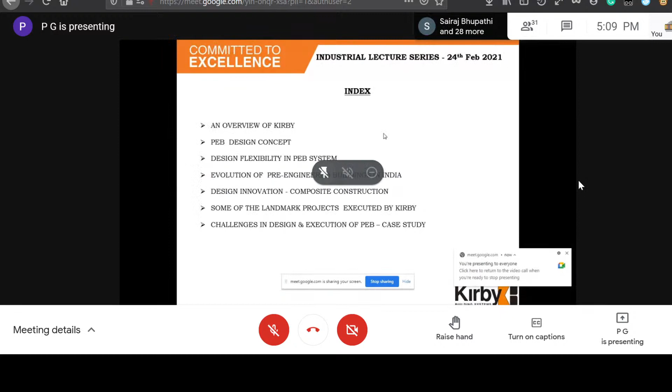In this, I would like to present an overview of Kirby and PEB design concept, design flexibility in PEB systems, evolution of pre-engineered buildings in India, composite construction with a brief note on that, some landmark projects executed by Kirby, then challenges in design and execution of PEB, and a case study.

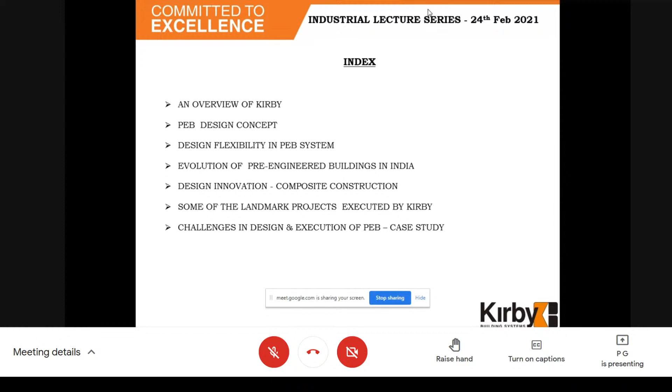I've taken up a case study to present those. Now, an overview of Kirby.

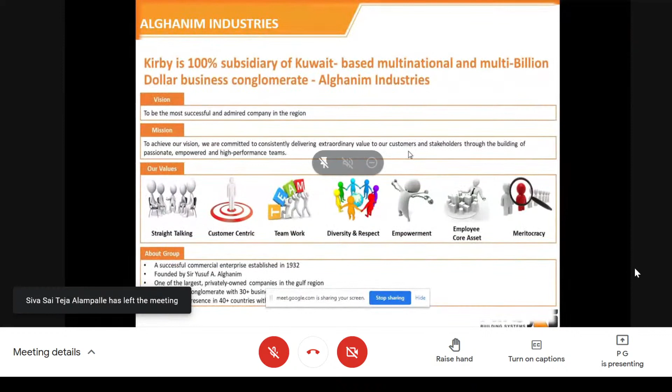Kirby is a part of Alghanim Industries, which is a Kuwait-based multinational and multi-billion-dollar business conglomerate, and Kirby is a 100% subsidiary of it. We have a high-tech standard vision and values.

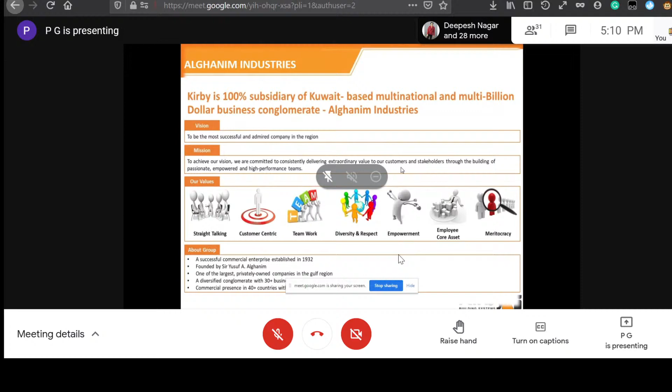About Alghanim Industries, it started in 1932, founded by Sir Alghanim, and it is one of the largest privately owned companies in the Gulf region.

Other than Kirby, it has many other business sectors, and it is worldwide with an international presence. Business sectors include automotive, engineering, food and beverages, industrial, consumer, and service. So Kirby comes under the manufacturing sector.

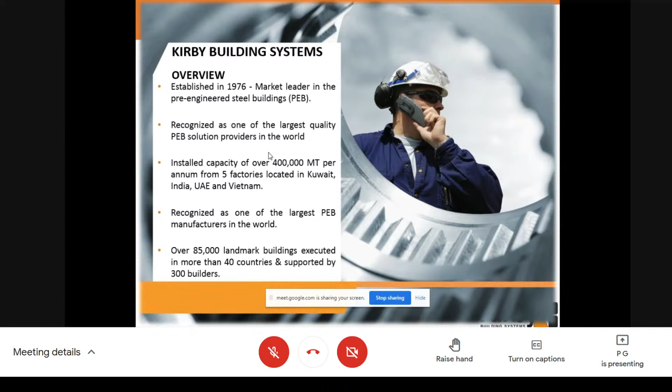About Kirby, it is established in 1976, a market leader in pre-engineered steel buildings, one of the largest quality PEB solution providers in the world. We have a manufacturing capacity of 4 lakh tons per annum, 5 factories located in Kuwait, India, UAE, and Vietnam. We are recognized as one of the largest PEB manufacturers in the world, with over 85,000 landmark buildings executed in more than 40 countries and supported by 300 builders.

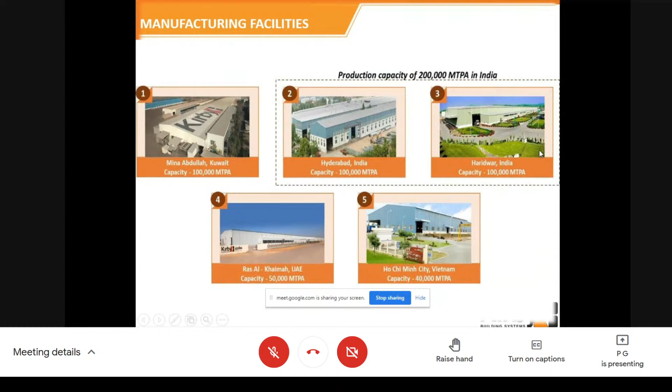You can view the factories here: 5 factories we have, 1 in Kuwait, 2 in India in Hyderabad and Haridwar, 1 in UAE, and 1 in Vietnam. This is our corporate office located at Madhapur, called the Center of Engineering Excellence. For all four plants except Vietnam, we have all engineering activities here.

Systems and practices: we have very expert engineering, about 250 structural engineers, and we have a state-of-the-art facility to quote the most optimized design for any kind of complex building in a minimum short time, using sophisticated latest software.

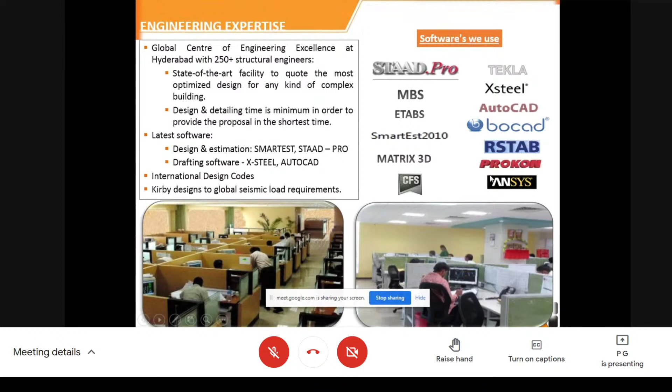For design, we use STAAD.Pro, MBS, ETABS, in-house software like Smartest and Matrix 3D, and for cold form sections, CFS. We use Tekla, Xsteel, AutoCAD, BoCAD, RStab, Prokon, and ANSYS.

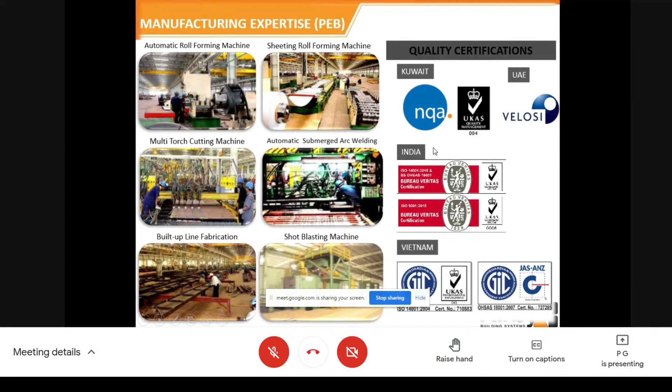Expertise like structural steel: for structural steel in high-rise buildings and power plants, which also require material plate thicknesses more than 60mm and even up to 100mm. So to cut, we require the most accurate CNC cutting machinery. We have all the sophisticated machinery here.

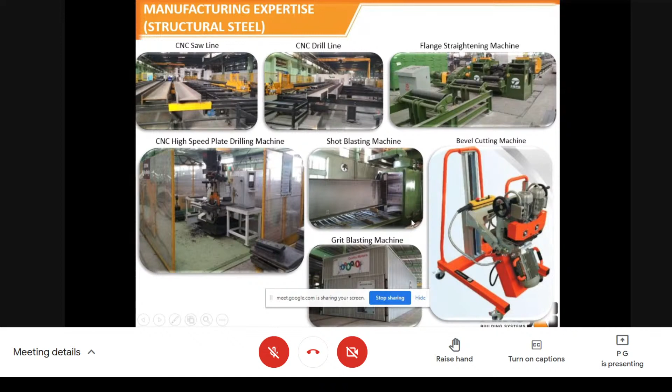We have a separate production line for storage solutions, because all these are made of slotted cold form sections, which is suitable for racking and other storage solutions.

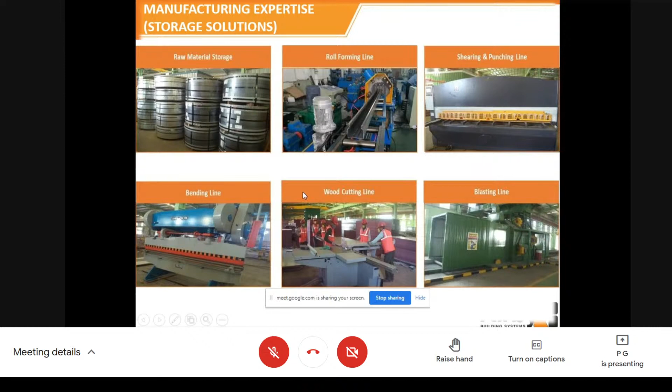And we very meticulously do material inspection from time to time for all the basic material as well as the finished product. Checks are done at all stages to provide a quality product to the customer.

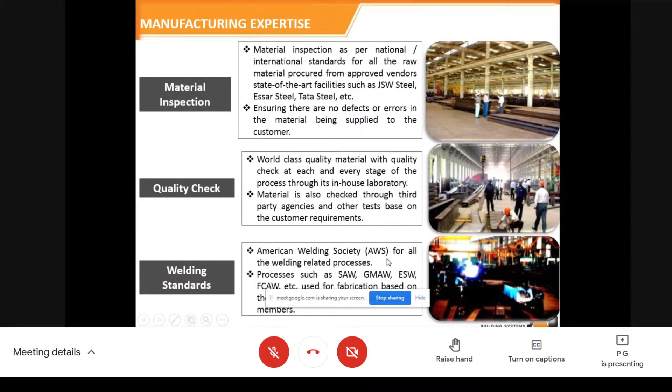This is the quality laboratory. We have very latest machinery for mechanical property testing, destructive and non-destructive, welding ultrasonic tests, and salt spray test.

And these are all the checks other than the regular quality checks. If the customer requires any special checks, we do all this.

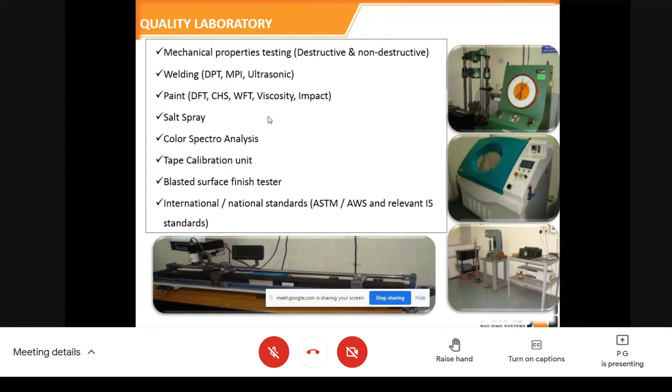Safety procedures are very important to maintain, to achieve and maintain zero accidents as our goal. So at every stage in production, in the factory, as well as at every site, we follow these norms.

We follow the LEED requirements for maintaining the product as a green building, because steel is recyclable and it can be reinstalled wherever location we require, with no welding fabrication at site. We ensure that to save energy.

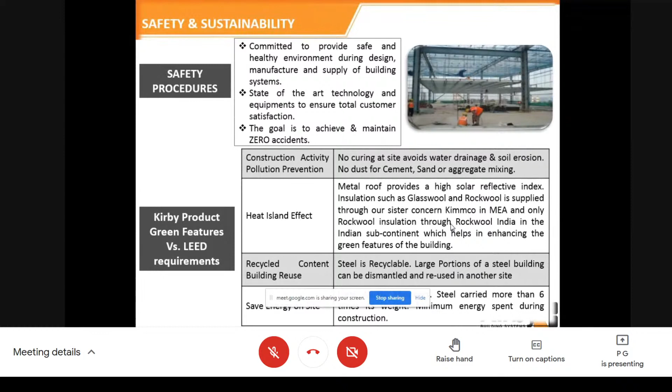The other products, other than PEB: Kirby also does structural steel as well as storage solutions.

The Kirby PEB applications are various; any building can be done with the PEB concept. As an example, the sectors are divided as industrial buildings, warehouses, offices, showrooms, aircraft hangars, metro stations, agricultural buildings, and auditoriums. Any product, any building, any structure can be done with the PEB concept.

Kirby has proved that. Kirby is the market leader across all regions wherever it operates, having completed over 85,000 buildings globally and over 25,000 buildings in India alone, totaling 35 million square meters.

The greatest thing for the success of Kirby is that we attend to the customer to the fullest, so that 60% of our business is from repeat customers.

The largest PEB in terms of area, a single project in Chennai, Renault Nissan, is 3 lakh square meters. So this is the world's largest PEB, done by Kirby.

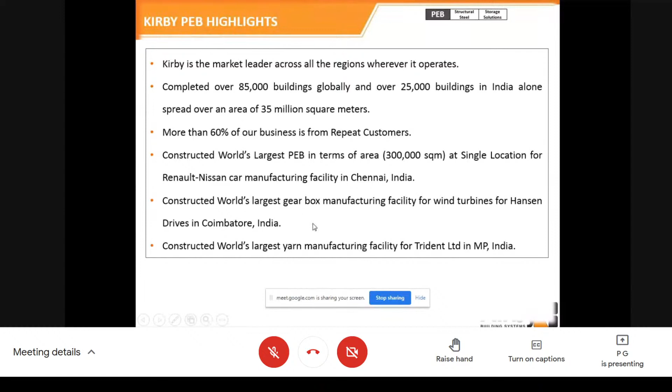Kirby constructed the world's largest gearbox manufacturing facility, the world's largest yarn manufacturing facility, the world's largest container glass manufacturing facility, and the world's largest facility for Suzlon Energy.

Kirby is the only big company which could dare to take on the challenge to lift a 500-tonne crane and tested its site for Alstom Bharat Forge.

A great achievement for Kirby, partnering with all the top leading companies across various industry segments for setting up their industrial facilities in all regions.

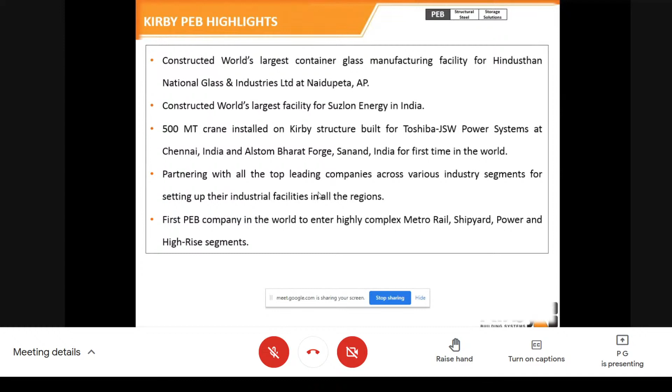Kirby was the first PEB company in the world to enter the highly complex metro rail, shipyard, power, and high-rise segments. So with all these highlights, Kirby has established itself as leader in PEB in the world.

Other than regular applications, we have also taken up special projects like multi-story buildings with composite construction. This building, Phoenix, is in the Gachibowli area, and all the columns are made with composite columns.

Flyover bridge in Delhi, which is done for faster arrival. We have taken up this, and each girder weighed around 3,000 tons.

This is infrastructure, other TG buildings. This is the G plus 13 floor building in Jammu and Kashmir, a residential complex.

So that's a big challenge to be taken up by Kirby. And heavy structures like in Mumbai, G plus 12 floor, with heavy loads in all floors. So these are all done with PEB concept.

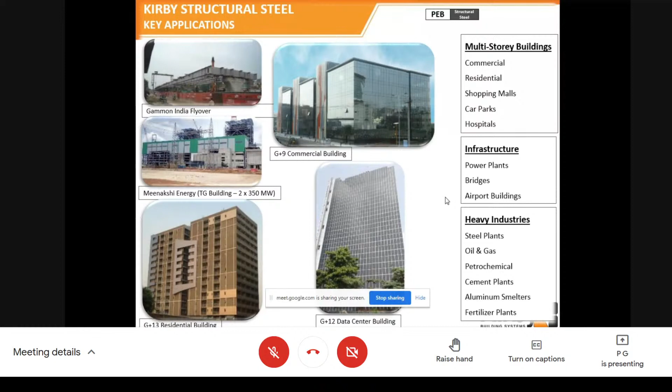This is the product range of storage solutions, the racking systems, weight racking systems which are installed inside a warehouse for storing their material to save the storage space.

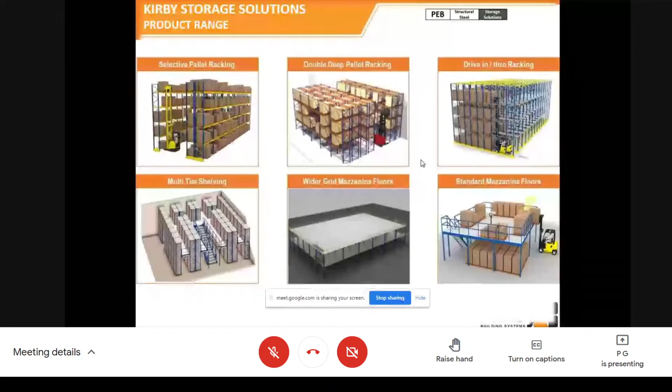So this is all about Kirby. Then regular PEB design concept is explained here now. It's a typical pre-engineered building system. It shows a PEB building.

They're having a width and length. And this building has a roof, has side walls, and these are end walls. And it basically contains the main frame along the width direction, spaced at a regular interval, and it is called spacing.

And the secondary framing system that was arranged on the roof, connecting all the frames or the purlins, and connecting all the columns on the sides and ends are called the side wall and end wall girts, and a bracing system which will resist the longitudinal forces, longitudinal wind forces, and the longitudinal forces are transferred from roof bracing to the wall bracing and to the foundation.

Vertical forces are transferred through the rigid frame to the foundation to the anchor bolts. Then the sheeting, the roof sheeting and wall sheeting, the profile metal sheet, which helps as a weather tight envelope.

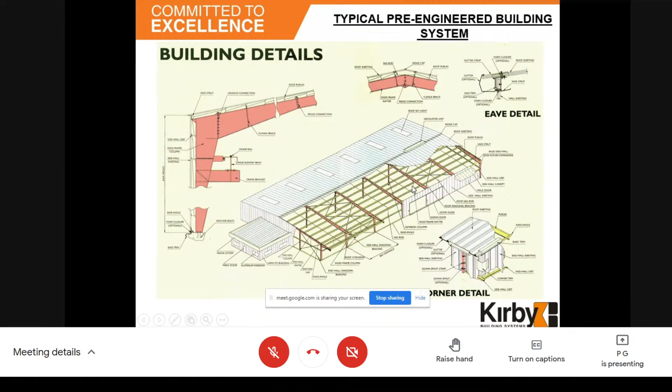And as I told, in PEB design concept, exterior cladding will act as a weather-tight envelope, and it transfers the structural loads like wind to the frames. Because these structures are lighter, wind will be the predominant load acting on the structure. So the engineer should be able to calculate the wind forces very precisely on these buildings.

So these forces, the dead load and wind forces, will transfer to the secondary framing, and they will be transferred to the main frame, and through the bracing system, the longitudinal forces will be transferred to the foundations. So due to the systems approach, use of high-strength steel and use of tapered built-up sections, which are optimized by the computer design program, and the use of continuous light gauge secondary steel sections, there is an overall reduction in steel weight, cost, and time when compared to conventional steel construction.

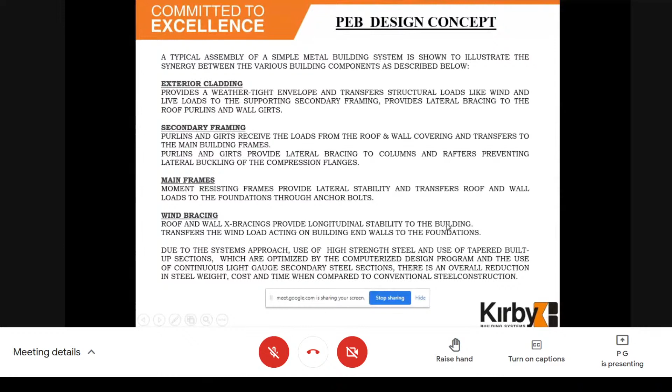The codes and materials - there is a huge upgrade on the codes also. Under AISC, American Institute of Steel Construction Manual, for the primary frame design, and AISI for the cold form section design, and MBMA. MBMA is a manual made by all the PEB manufacturers in the US, who formed an association, and in line with the American code AISC, closely working with AISC, they developed a manual which gives guidelines for

metal buildings. That helped a lot in initiating PEB buildings into the market, and that was very successful. And the same is used here to take the PEB concept into the market in the very initial stages.

So AWS is another code, for welding. It gives very elaborate welding standards, and it is universally followed.

Then Indian codes, as the buildings here we construct in India. So for wind load calculations, we adopt IS 875, and for seismic loads we adopt IS 1893. And alternatively, or as an option, when the design is asked very precisely by the customer, as per IS standards, we follow IS 800 2007.

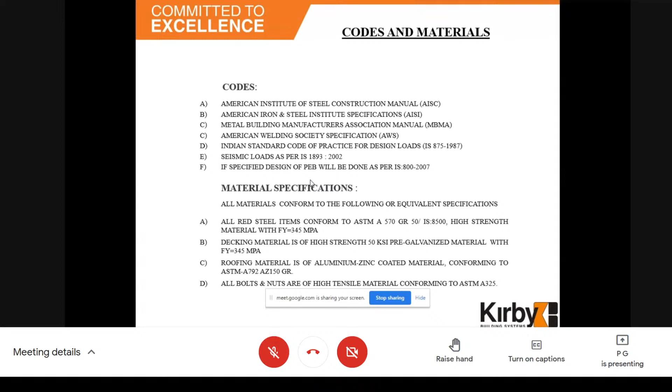So sections used in mainframe - the optimization of PEB is achieved basically by changing the concept of analysis. In the conventional building, we take a truss, wherein the roof truss is designed separately and the columns are designed separately, whereas here we go with the rigid frames.

The rigid frames are of various types that are adopted - rigid frame without any intermediate support. By adopting this concept, gable portal, some people call it gable portal. With this, the bending moment will straight away reduce when compared to the simple beam, reducing the load carrying capacity required.

Following a pre-plated I section in place of hot rolled section. Hot rolled sections are available with mild steel, like 250 MPa grade, whereas we are using high strength steel, that is 345 MPa steel. By directly increasing the strength, we require a reduced section modulus for the same requirement. Hence, that's how optimization is achieved on the primary.

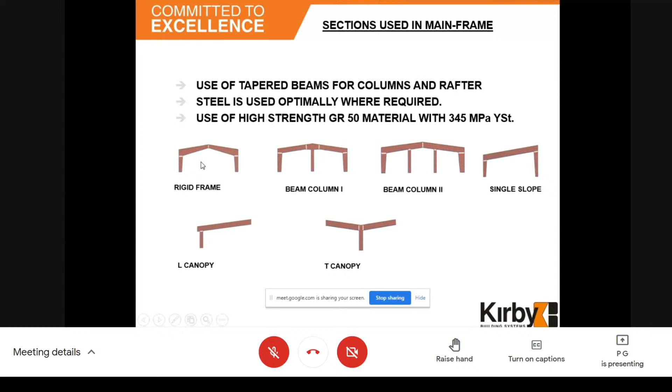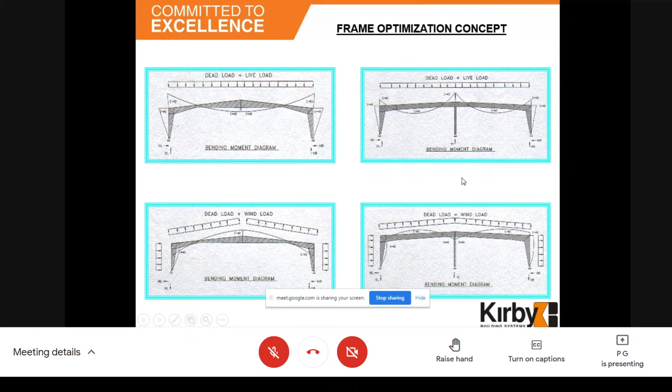The frame sections are selected to suit the bending diagram and to get the utmost optimization. And the secondary members are the cold form sections.

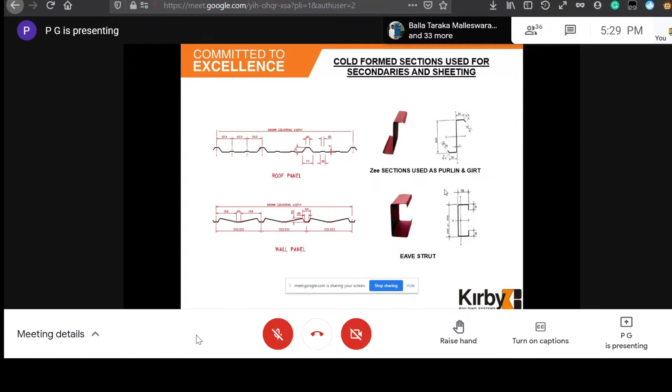It's a great invention, cold sections, because they provide the highest strength to weight ratio.

Whereas in conventional construction, ISMC or angle sections will be designed as simple span beams. So there also, with the concept of analysis, we are making a simple span into a continuous beam and reducing the moment there. By providing these light gauge sections, reduced weight but the strength is achieved. That's called secondary members optimization.

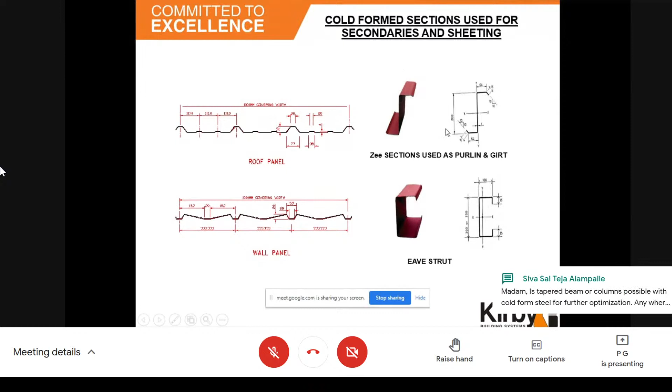One more advantage of cold form sections is, as per the engineer's choice, any shape can be formed with the cold roll coils. These are the typical roof panel profile and the wall panel.

And there are also color coated or galvanized sheets, zinc and aluminum coated sheets, to prevent corrosion.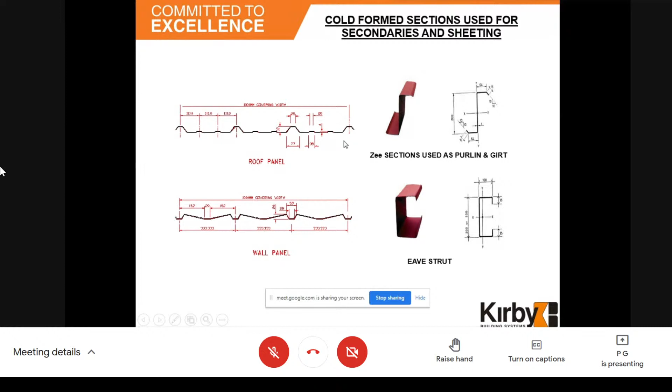As I told, this is the optimization of secondary members - you can see these are the rafters over which the purlins are made continuous, providing a lap. That is the concept of optimization of secondary members.

So in general, the main frames are designed with pinned or fixed base connections and continuous with moment connections at all frame splices. Purlins and girts are made continuous over the rafters, and sheeting is also designed as a continuous member supported over the secondary members.

And crane beams are simply supported only, there is no change in that. But the only thing is we use high strength steel here to reduce the beam depth. Beams are simply supported, and where beam spans are more, they can be made fixed also.

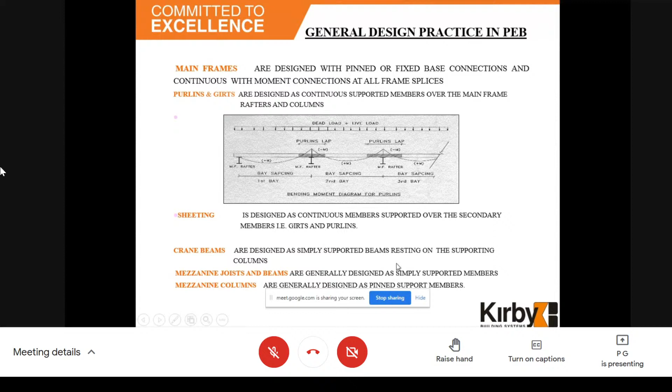Mezzanine columns are usually considered as pin supported members, but as per the requirement, if required, we can make them fixed also, fixed at the base. I just want to show the flexibility of PEB when compared to conventional construction.

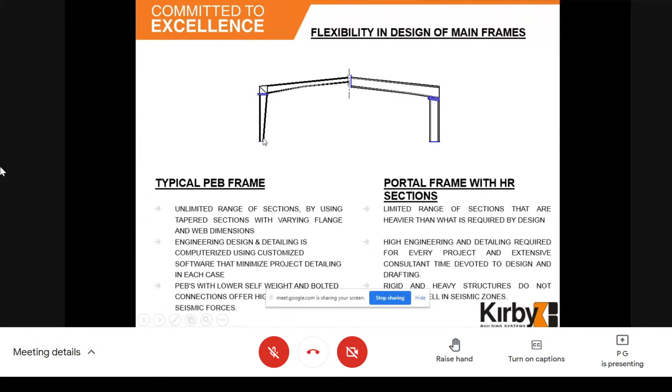The same frame, portal frame analysis. This is the regular PEB section, optimized PEB section, tapered column and rafters. For the same moments, if you select hot rolled ISMB, it has to be provided as a straight column, you will not get optimization. That's how PEB, like a three-plated I section tapered, will have more optimized weight when compared to hot rolled sections.

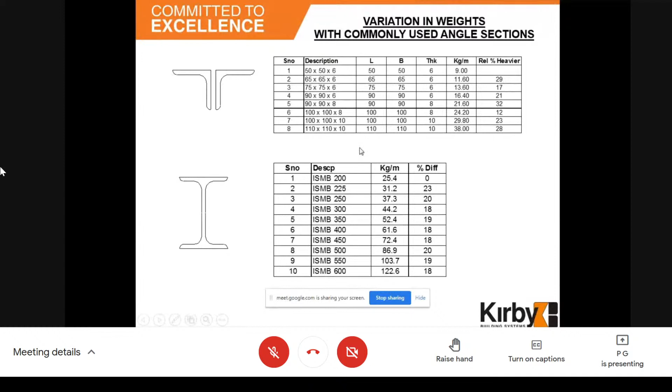And when you select a built-up section, the engineer has plenty of choice in selecting his own sections. The weight variation will not be there at all, but provided he has to select the section based on the section classification provided in the code.

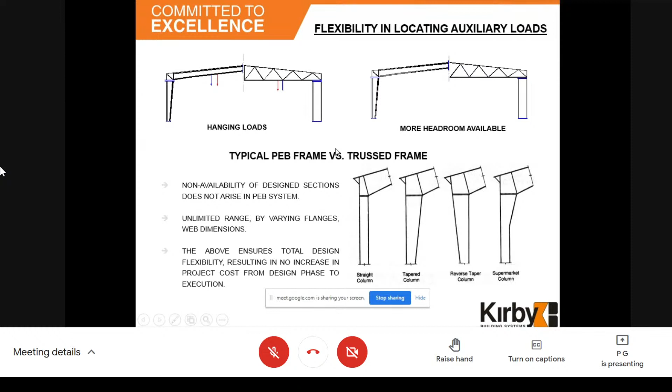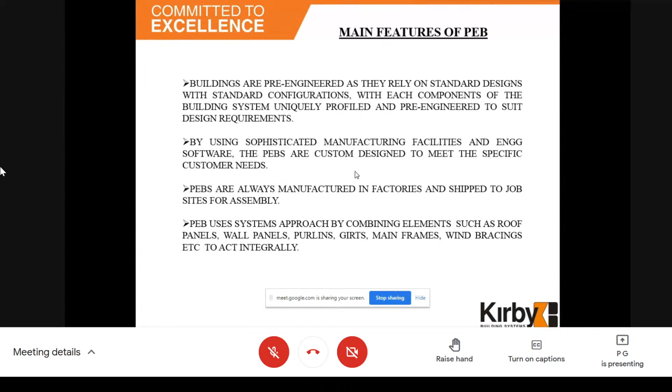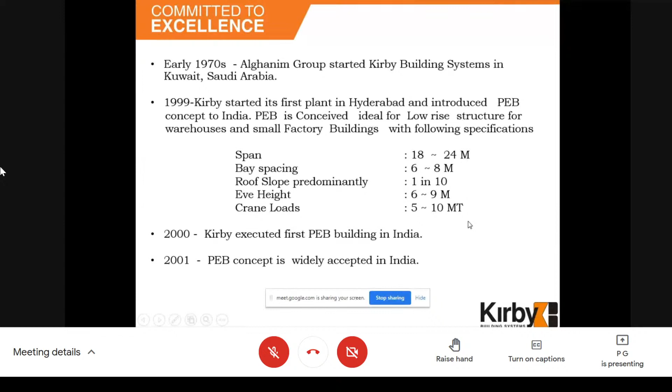The first project got launched, and in 2001 the PEB concept started getting accepted by customers and consultants, and we started seeing more jobs. In 2005 we started the second plant in Hyderabad. In 2010 we took up PEB concept multi-floor buildings, with mezzanine floors and cranes also. So multi-floor G plus 1 or 2 buildings, we started for offices and units.

In 2015 we did a G plus 13 floor building in Jammu and Kashmir. In 2017 we have gone up to high buildings, up to G plus 25 floors in India.

So we have expanded our work, and we have successfully achieved and completed all those projects.

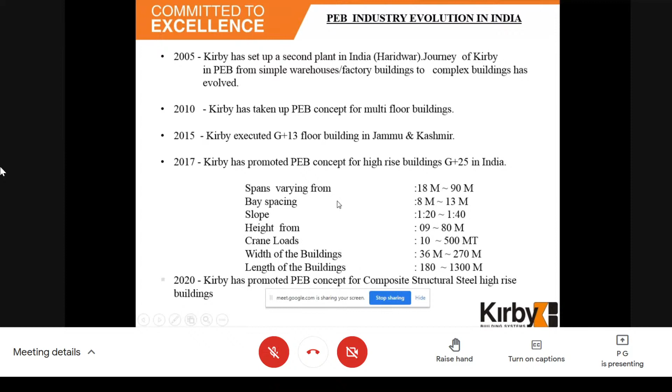Composite construction, the mezzanine floor is a steel mezzanine floor. I just want to explain, and this is how it looks. The main beams are kept on... these are the main beams, and these are secondary beams which are called joist beams, over which the deck sheet is laid.

On that, the nominal reinforcement should be provided, and over that, concrete will be poured. So this is the regular arrangement of a typical steel mezzanine floor.

In this composite, we design the joist as composite. As of now, we are doing the joist alone as the composite, so shear studs are connected.

This is a profile deck sheet over which reinforcement is provided and concrete will be laid. This will speed up the work. While doing the concrete casting at the top, people can work below, so there will be no formwork disturbance there, so that's how it will be very fast work.

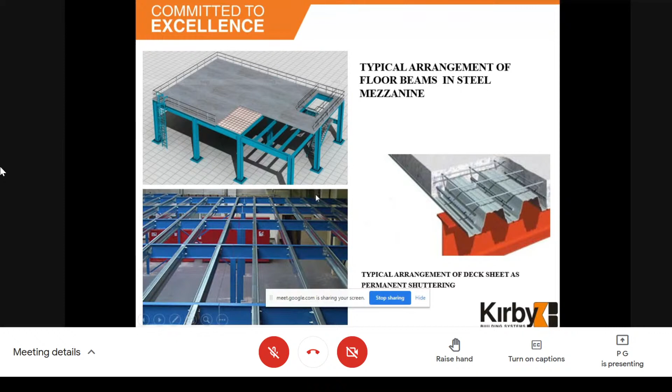Without a deck sheet also, with shear studs, we have some Indian codes for that, so some people will do that, but with a deck sheet is how we do the mezzanine floors with composite action.

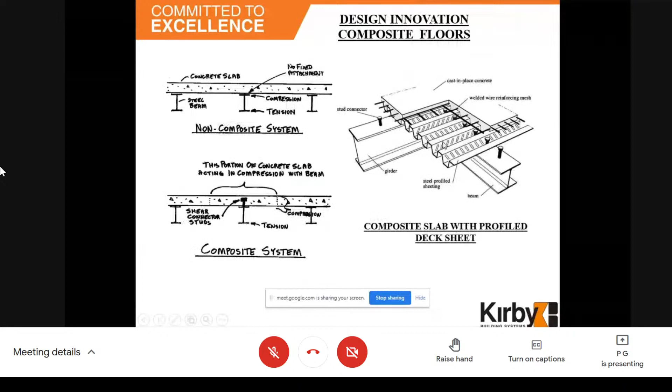This will further optimize the structure. And columns, when it comes to columns, there are various types of columns other than a regular I section or tube section.

This is a box column made up of 4 plates. Bigger columns we did for few projects, where 4 plates are welded on the corners to achieve the required size.

And this is a star column, wherein the framing action is required in directions. We adopt this type of column also.

Composite columns are a section embedded in concrete with heavy reinforcement, and same I section embedded in the concrete column with heavy reinforcement. This is a tube column with concrete filled inside, concrete tube, and this is a concrete tube without any internal reinforcement.

This concept has gained a lot of importance because the size of the column will get reduced when compared to a regular column, so the floor space will be improved.

Because these tube columns can be manufactured directly in the plant, they will be supplied and executed at site, and only poured at site, so that will be faster construction.

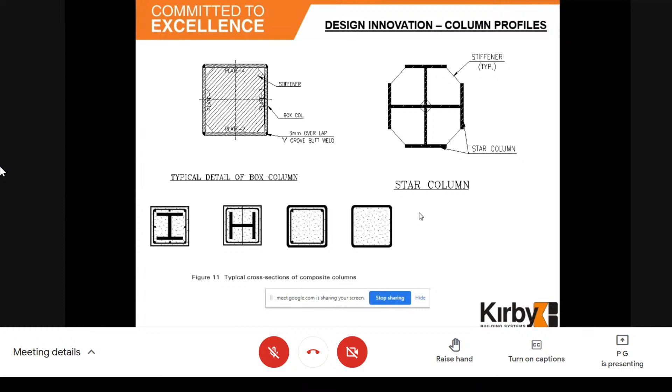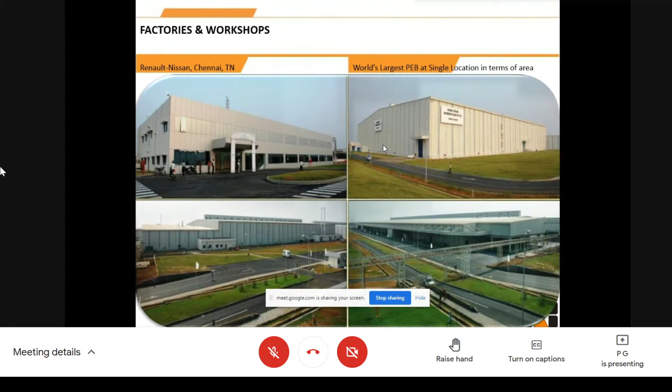It's a 1.3 kilometer length. Pictures are picked to show different types of images to you. For aesthetics, you see, you cannot believe that it's a steel building. Any type of architectural feature can be added to this.

This is a substation structure near the substation. On this PEB building, the towers are executed on which the cables, the ground wire, and the power cables are connected, so that carries special loads and special load combinations. We could take it as a challenge to do that, and we could do it successfully.

Motors, Ludhiana beverages, and Fine Zeelandia, Commercial Synbags building. You see the shape of the building, so any shape as required can be done with this concept.

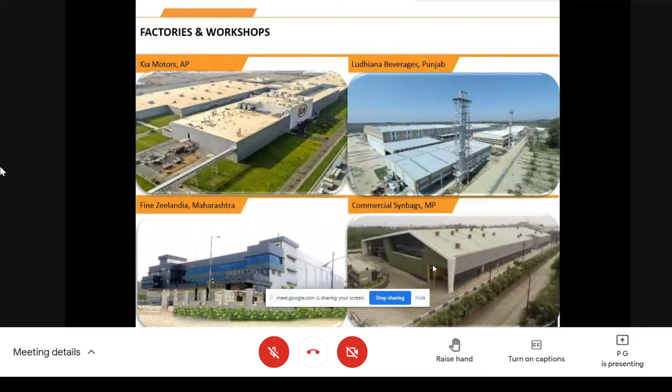Various projects with different elevations, and these are also common. These are pharmaceutical buildings: Reddy Labs, Cipla, Flamingo, and other factory buildings. You can see this architectural feature.

Everything is possible with PEB because there are various types of flashings and curvature in the beam and secondary members and primary members. It's possible to do this.

These are structural steel works like conveyor structures and pipe support structures done for JSW and Meenakshi Energy. It consumes huge steel, and all this is done using the PEB concept.

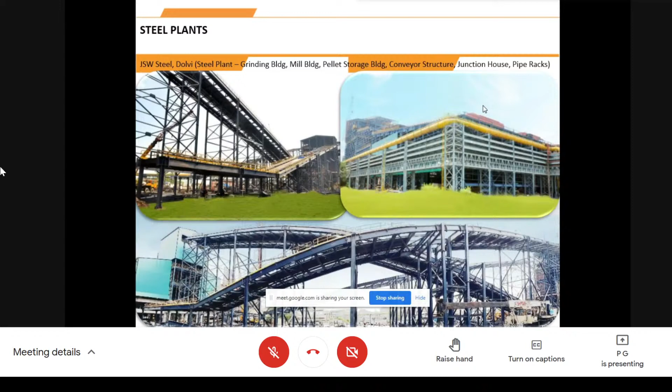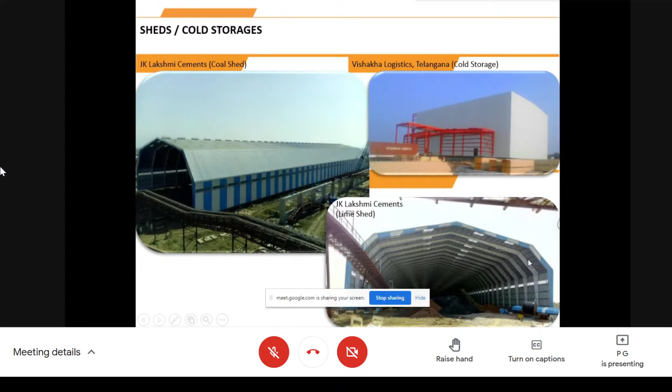And this coal handling shed is to cover the conveyors and provide clearance. To optimize the frame, we have made a segmented rafter, so aesthetically also it's good and serves the purpose, and it's a cold storage building.

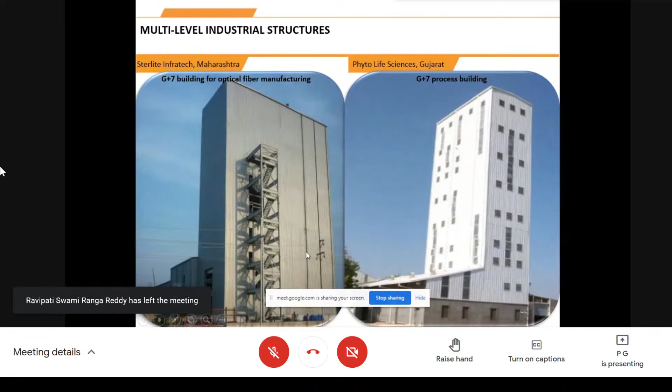Process plants, and in the entire building, a small part of the building is taken as a tower to cover the process equipment inside the building.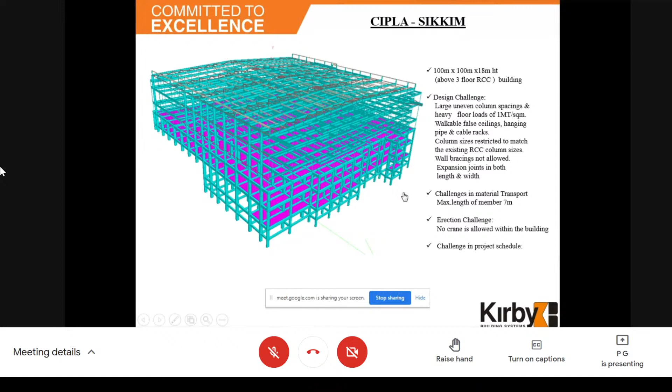That's the capacity of Kirby, and the teamwork of our employees is great - we accept all these challenges. That's how we have become the world's largest PEB manufacturer and supplier.

So this is the sequential erection - just want to show some interesting slides to the engineers. This shows the order of execution of the project. Initially a few columns are erected, then the second stage of columns. You can see tower cranes installed outside the building on either side; one arm takes care of 180 degree reach, and the other arm takes care of 180 degrees from the other side.

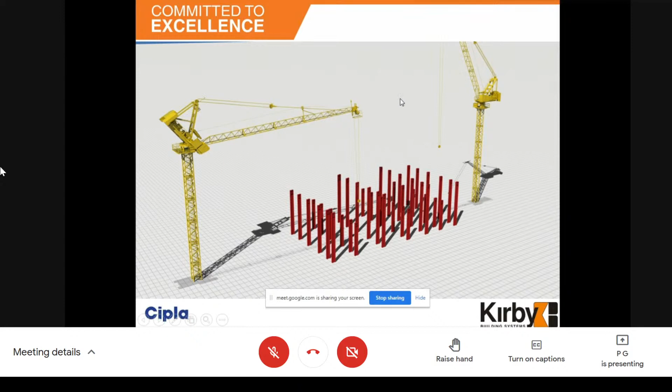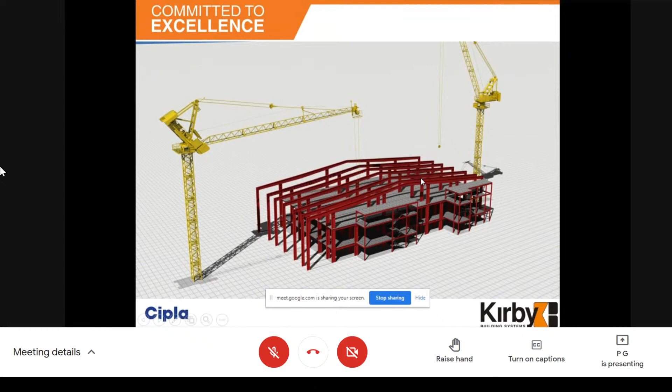This is the next level, installing floor by floor. The first floor is executed, then the second, and while casting the concrete, the second floor beams were erected, then the roof rafters, along with added staircase structures and new structures, done simultaneously. Then the rafters are executed and the remaining structure is completed in the same manner, followed by sheeting and the turbo vents.

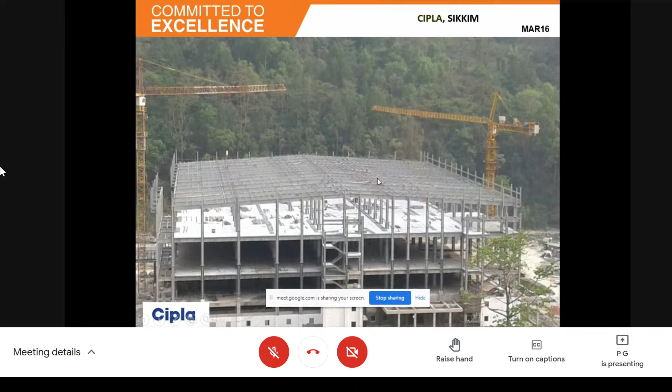This is the real picture of the project during erection. The total consumption of steel was 4,000 tons, and we are very proud to say that we have done a very successful project.

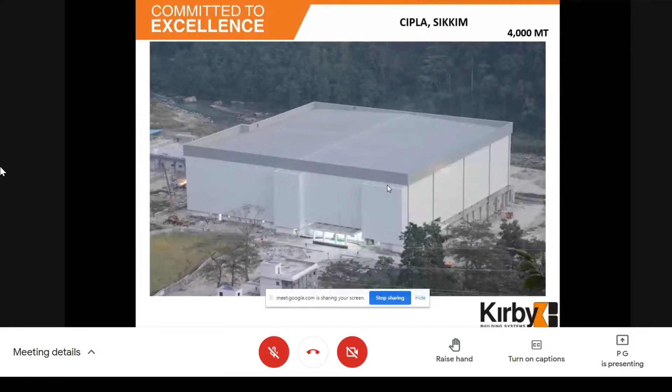So this is all about this project, and this is the 500-ton crane I was telling about for the Alstom turbine manufacturing unit. Kirby is the only PEB manufacturer who could take up this challenge and successfully do the lifting of the 500 tons.

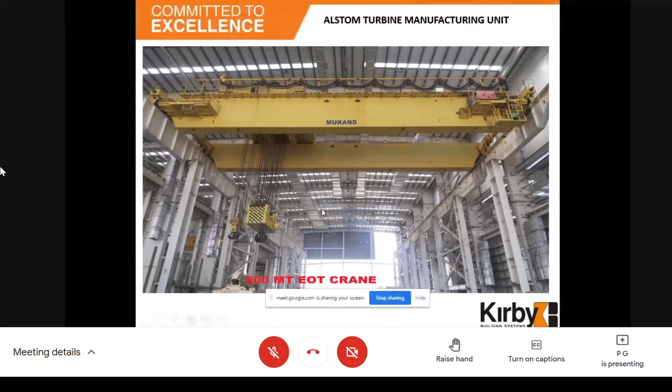The testing of that was also done - lifting 500 tons from the lifting test was done at site.